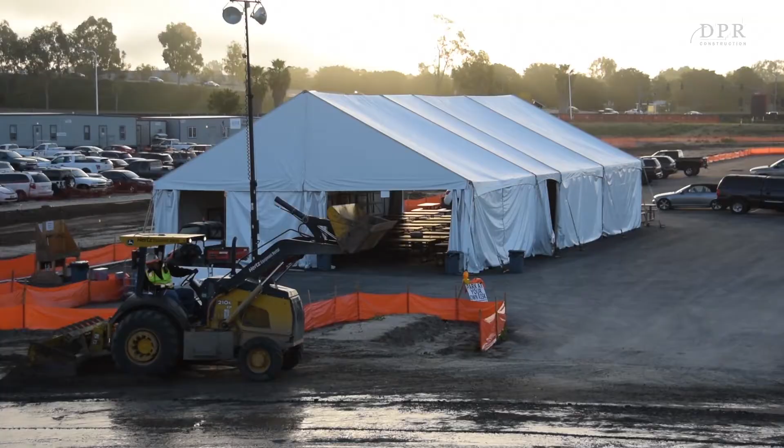DPR has spent a lot of time developing a plan to build this project safely. Each building has a building superintendent who is available to address any safety or coordination issues promptly. There are weekly coordination meetings held with your management that always start out with safety. Please adhere to all job site rules, including parking locations, lunch break areas, and designated smoking areas.

All deliveries to the site must be coordinated with DPR. DPR has established a web-based delivery notification system to ensure you can get your materials on site on time. You are joining a dedicated team of construction professionals. Together we will complete this project safely, on schedule, and on budget. I look forward to working with you to meet these goals.

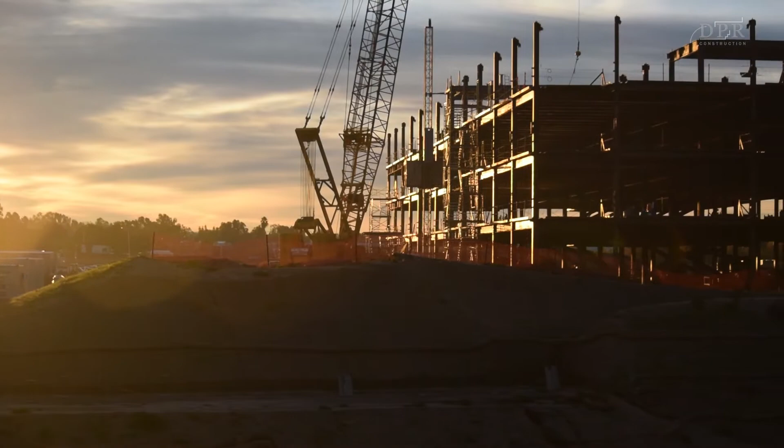So to give you all some perspective on DPR and its safety culture, which may be different than other general contractors you work with, it starts with DPR's mission statement, which is to build great things. Our safety policies aren't built on cops, aren't built on safety individuals chasing you around the site, making sure you're doing the right thing. If you see me out on site, if you see any of the safety personnel, they're there to help you, to encourage you, to inspire your managers, your superintendents, your foremen, to make the right decisions, to do the safe decision.

Even if it costs more money, we can work out the dollars, but what we can't replace is you. One of my personal objectives is not only for the safety of the job site personnel and our workers, but of the surrounding businesses, their workers, and the general public, the motorists, the pedestrians, the bicyclists that pass by our site. We are very concerned about the way we exit a project, the way we enter a project, and how we maintain the peripheral infrastructure around the site.

It's very, very important to me personally that everyone return home the same way they came to work. With that being said, have a safe and productive day.

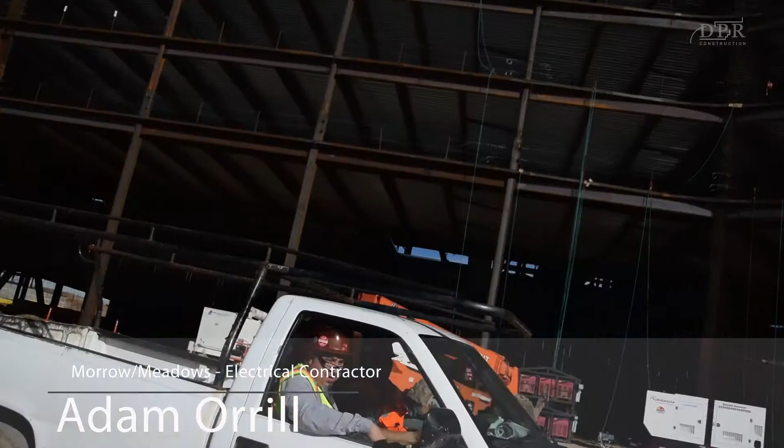Thank you. A successful project to Morrow Meadows and his whole team is everybody going home safe at the end of the day, having a productive day, and ultimately, a satisfied customer so we can move on to the next project and do the same thing.

The safety to Morrow Meadows, it's not a process, but it's a culture and a lifestyle, and we practice that not only on the project, but at home as well.

We have a saying at University Mechanical regarding safety. It's simply this: be vigilant. Our company safety program is designed for continuous improvement for the health and safety of our employees. So with that, remember, be vigilant. Be vigilant, look out for those dangers and difficulties to ensure that everyone goes home safe.

Occasionally throughout this project, we'll host craft lunches. These lunches are a great time to get a handful of people from different trades around the project to sit down and talk openly about the job. What should we stop doing? What should we start doing? And what should we continue doing to make this a safe, productive job site for everyone? You might be asked to participate, and it's not mandatory. You could say no, but we hope you look forward to it.

Your voice matters. The OCPC campus is constructed on 74 acres of strawberry fields, located just south of the runway at the former El Toro Air Base. The first phase of the project consists of 4 research and development buildings where Broadcom will be designing and testing the technology that connects our devices. In addition to the 4 R&D buildings, there's also a public road, now called Marine Way, and later to be renamed Great Park Boulevard.

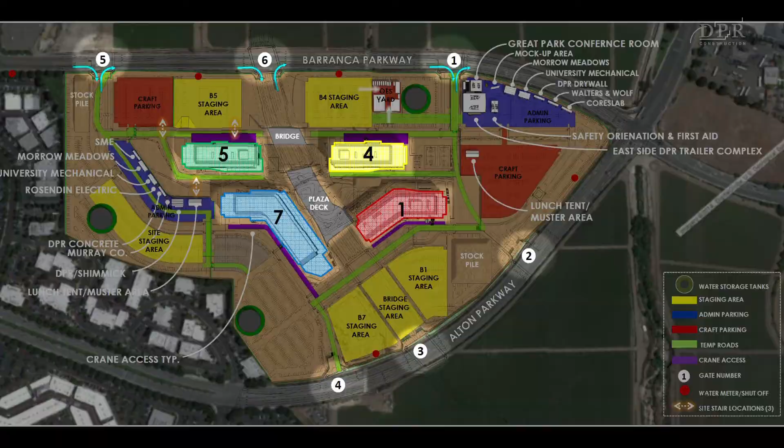There is work that occurs throughout all phases of construction on both Barranca and Alton Parkway, so gate openings may be relocated to accommodate that street work. We'll communicate those gate closures at the weekly safety meetings.

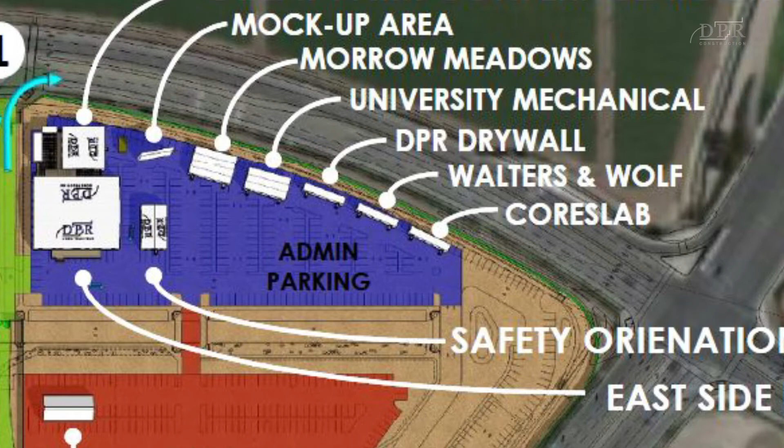There are two trailer complexes located on the site. The main trailer campus is located on the east end of the site. This is where you're sitting now if you're in the safety orientation. Adjacent to the safety trailer and first aid clinic are the main administration trailer and the conference center, where DPR sits with the design team and representatives of OCPC and AECOM.

The working hours for the job site will vary throughout the year depending on the daylight. We'll do our best to get everyone working as soon as it's safe to do so, and as long as it's in compliance with the City of Irvine working hour requirements. We'll notify everyone at the weekly safety meeting in the event of any changes to those working hours. We will also post signage at the vehicle exit gates as a reminder.

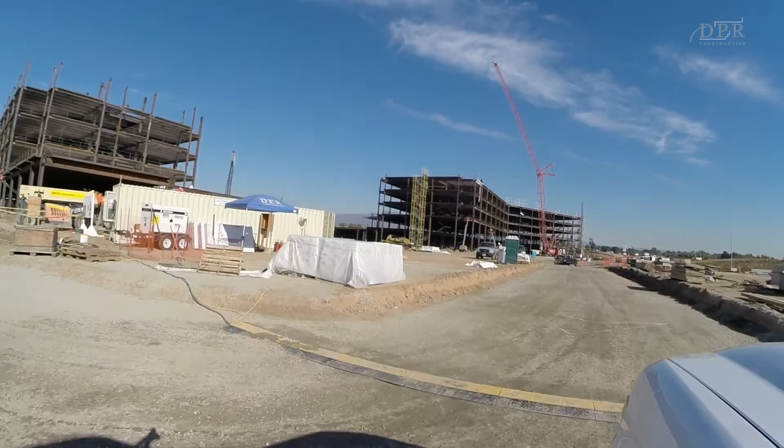Buildings 1 and 7 can be accessed from two levels. You can enter on the ground level from the south side of the buildings, or on the plaza level on the north elevation of the buildings. Material staging is located to the south of both of these buildings.

For buildings 4 and 5, there's no ground level. These buildings start at the plaza level, therefore all access to these buildings is from the plaza.

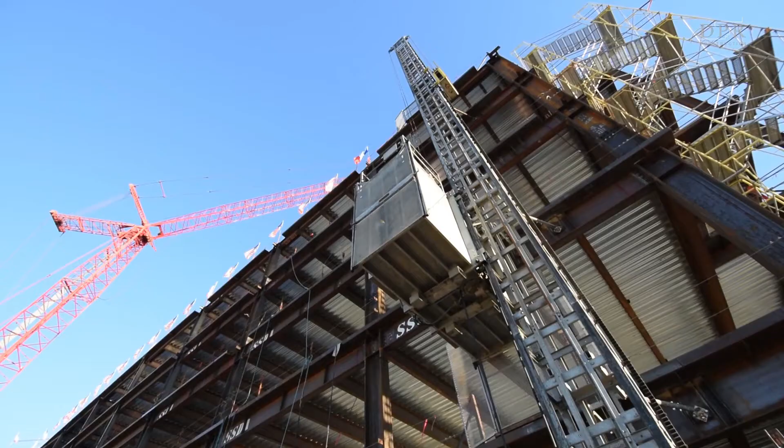There are material and personnel hoists located at all four buildings. The hoists are located at the south elevations of Building 1 and 7 and at the north elevations of Buildings 4 and 5. These hoists will remain in place until the permanent freight elevator is in operation at each building. At that point, all material will be loaded either by forklift through an opening in the building exterior or by using the building freight elevators.

On a project of this size, there will be hundreds of vehicles entering and exiting the site every day. In order to prevent traffic jams from occurring at the gate and the surrounding streets, we ask that you do a few things. Have your parking lot hang tag displayed on your windshield or rearview mirror when you enter the site. This will keep vehicles moving past the security guard to the appropriate parking lot on site. You will be stopped by security if the pass is not visible.

These passes will be issued to you during your initial site orientation. Another thing you can do to help keep traffic moving through the gates is schedule your deliveries in advance. DPR will be using a web-based scheduling application to schedule these deliveries. Foremen and other persons responsible for those deliveries will get training on that website with more information on how that application works.

In addition to the parking hang tags, you'll also be issued a project-specific badge for this site. This badge includes each employee's photo, name, company, and relevant training certifications they have completed. All persons on site, including guests, must obtain a badge from the safety and orientation trailer.

If you forget or misplace your badge, please report to the safety trailer to obtain a replacement or temporary badge. Also, if you see someone walking around without a badge, kindly ask them if they need help finding someone and direct them to a DPR person or the safety trailer.

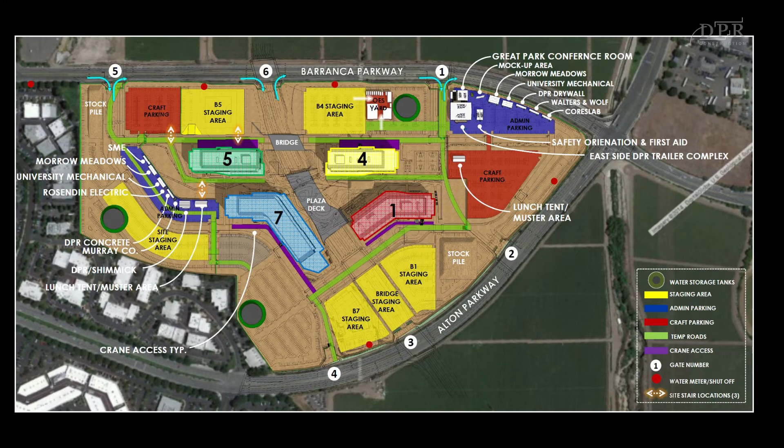In the event of an evacuation, there are two locations designated as our muster points: the west tent location and the east tent location. We will meet there with all individuals and get a head count prior to either being evacuated for the day or returning to work for the rest of the day.

DPR has zero tolerance items, which include drugs, alcohol, weapons, sexual harassment, or any discrimination of any kind. We also have fall protection violations, confined space violations, and lockout-tagout violations. These are automatic dismissal from any DPR project.

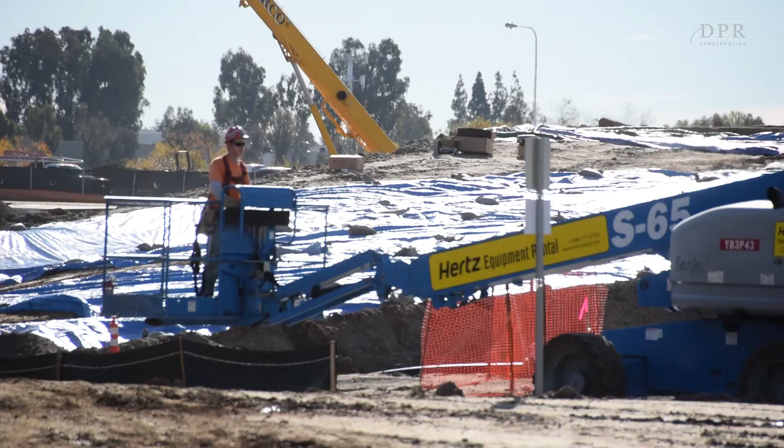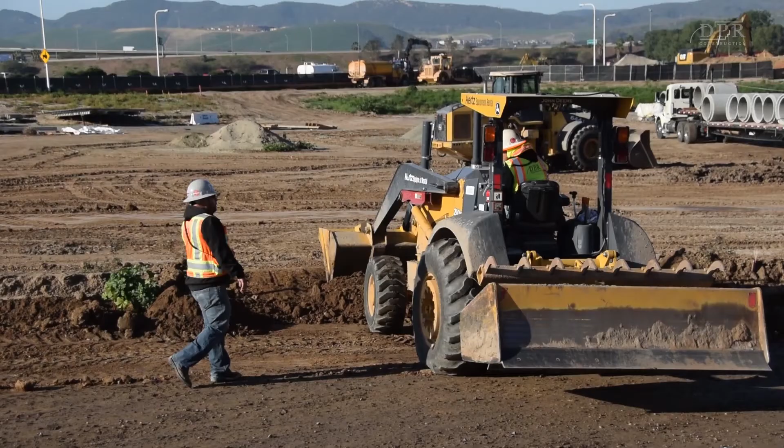With the size and capacity of this project, there will be numerous pieces of equipment on site, such as boom lifts, aerial lifts, scaffold operations, and forklifts. We definitely need personnel out there who are well trained and qualified for the operations at hand. From time to time, you'll be asked to provide verification of training. But please understand, we're not out here being safety cops. We're here to maintain a safe environment for you and others, and to verify that people know what they're doing with the equipment they're providing services for.

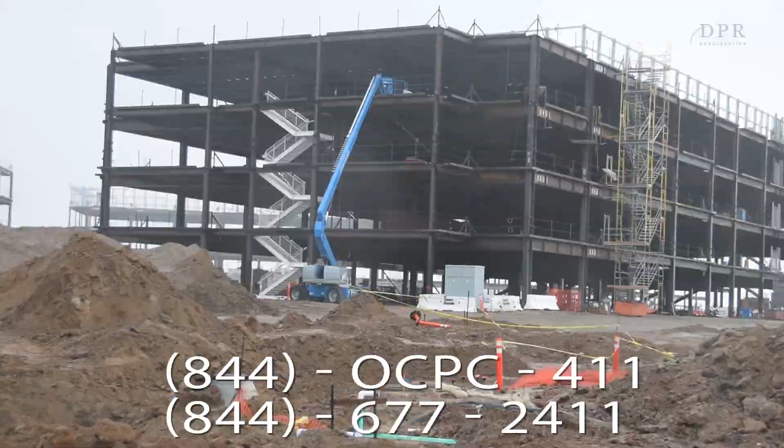There's an information hotline number specific to this project. Important job site information will be recorded on this hotline, including the job site address, work hours, and emergency contact information. This hotline will also be used in the event of rain. If the job site is to be closed for the day due to rain or another event, there will be a message on the hotline to let you know. That message will be recorded by 5 a.m. If it's raining, call in and make sure the job site is going to be open before you drive to the site.

DPR's philosophy is injury-free. We would like everybody to come to our project and go home to their family. We have four primary principles: supportive leadership, personal commitment, free and open lines of communication, and accountability. With these principles, we will all be successful in creating and maintaining a safe work environment.

We empower you to take steps in the event of an unsafe act or unsafe condition by addressing it with your direct supervisor or a safety person with DPR Construction. In addition, we have a safety hotline located in specific areas that you may use if issues are not being taken care of.

We definitely would like everybody on this project to hold safety as a value. Choose to work safe. Choose to go home to your family. We want to be successful, and we all want to go home to our family. Looking forward to working with all of you and accomplishing one goal: creating an injury-free environment and all going home to our families. Our number one goal.

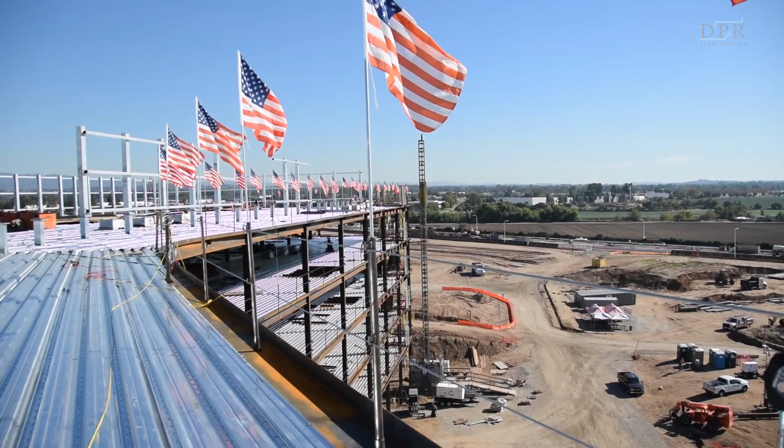Our number one goal is that you go home safe tonight. Nothing is more important than everyone going home to their family, safe and sound.